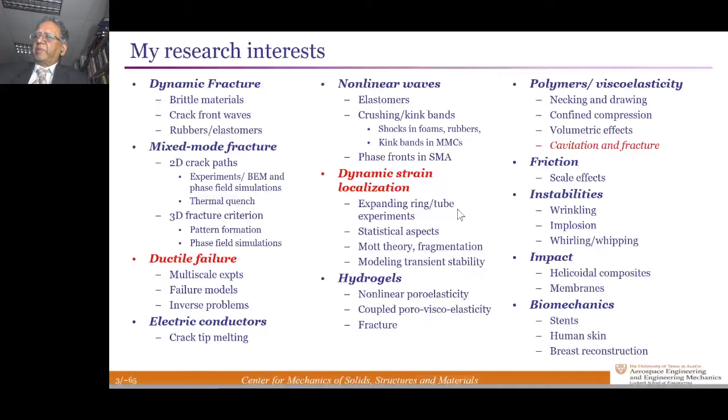And it's been a fun journey, because every time I get to design and run a new experiment, it's just pure joy. Experiments have been around for a very long time. I want to start on experiments with a story from an Indian parable of the six blind men looking for information on an elephant.

I'll provide this in a modern context. These six blind men are restricted in the sensors and diagnostic tools they can implement on the experiment itself, which is seeking knowledge of an elephant. Deprived of eyesight, they use their other senses of touch and feel, and each comes up with a particular picture or model of what an elephant is like. One thinks it's like a pillar, one thinks it's like a rope, one thinks it's like a wall, another like a spear, and so on. They're each convinced that their model is right.

And when they get together for their verification and validation meeting, they have a fight because each is convinced that he or she is right. What is needed here, of course, is more diagnostics. So they go for arbitration to a prince. He has other sensors, is able to see a bigger picture, more diagnostics, more information, a better model. So he says, all of you are right, but all of you are not right as well, because you don't have a complete picture. So what you need is more diagnostics.

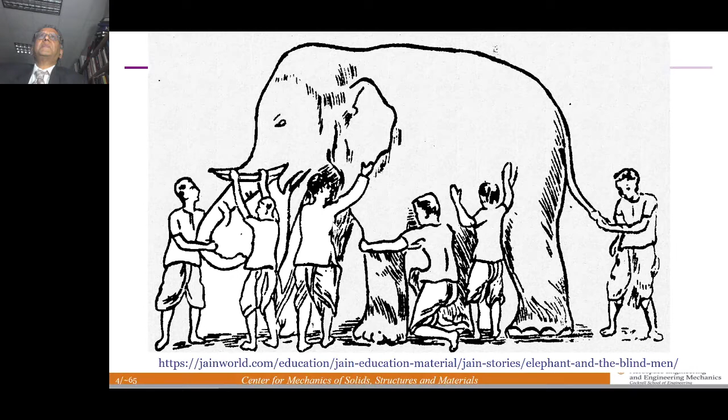Fast forward a few millennia. The founding father of sciences, in my opinion, Galileo Galilei, is reported to have said something like this, although there are questions about that: measure what is measurable, and make measurable what is not so. That's the essence of discovery. If you do experiments and instrument them with suitable diagnostics, you can develop much more insight into the problem and develop models that are truly predictive based on that.

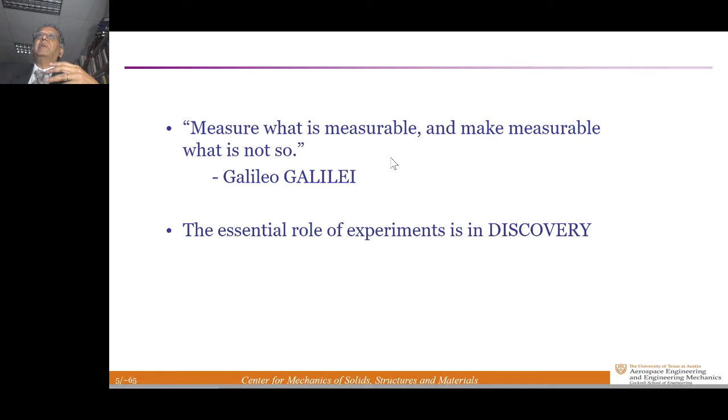So the interplay between experiments and models is very important, and it's been expressed very elegantly by a number of people. James Bell indicates that agreement, or a correlation, between data and prediction doesn't necessarily imply that any one set of assumptions is correct, or any one model is correct. You have to keep refining your measurements, you have to keep refining your models, until you come up with acceptable models that predict in a reasonably meaningful way.

But that means there's a plethora of models around for the same experiment. And the question is, what guiding principles should one use? This has also been a topic in the realm of philosophy for many decades, many centuries. The first and perhaps most elegant representation of this is called Ockham's razor. Ockham was an English friar in the 14th century thinking about the formulation of ideas, and in a cryptic way he says entities are not to be multiplied without necessity. All it says is, if you have a model, make sure the number of degrees of freedom is small—smaller the better—because the likelihood that model is right is larger, with fewer sets of parameters predicting a larger set of responses or outcomes.

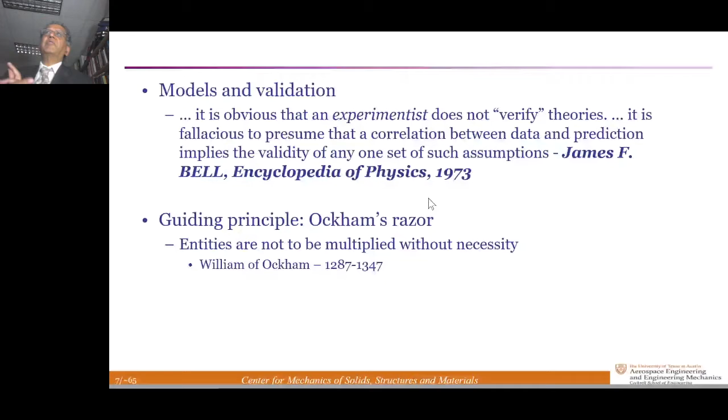So in doing experiments, I've taken a number of these ideas into consideration: Ockham's razor—make the simplest possible model to predict whatever phenomenon you want—and Galileo's idea that you need to instrument it and diagnose with as many measurements as possible. I want to illustrate this with a few examples. The first one relates to dynamic strain localization and fragmentation, and the key participant here is Haitao Zhang, who was a postdoc with me for a number of years. We wrote a few papers on this topic.

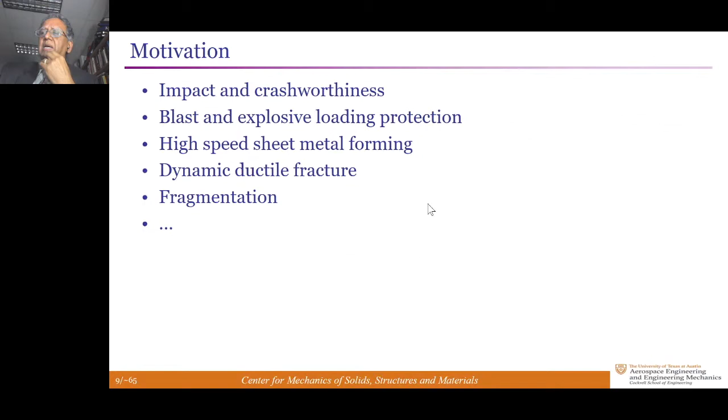It's a problem that arises in a number of applications in impact, blast, and high-speed metal forming, and so on. The main idea is for a ductile metallic material, if you do a quasi-static test, pretty much everybody knows that there's an inelastic response followed by localization at the Considère strain, and beyond localization, the bulk of the material or specimen doesn't deform, only the localized region deforms further, leading to eventual failure.

So the question that people raise is, what happens if the strain rates are large? Strain rates not quasi-static on the order of 10⁻³ per second or so, but 6 to 8 orders of magnitude larger, 10³ to 10⁵ per second. Basically two things could happen: a necking of this kind, or a sheet mode necking of this kind, where it thins in the third dimension but has a band at different orientations depending on the plane stress, plane strain constraints of the body.

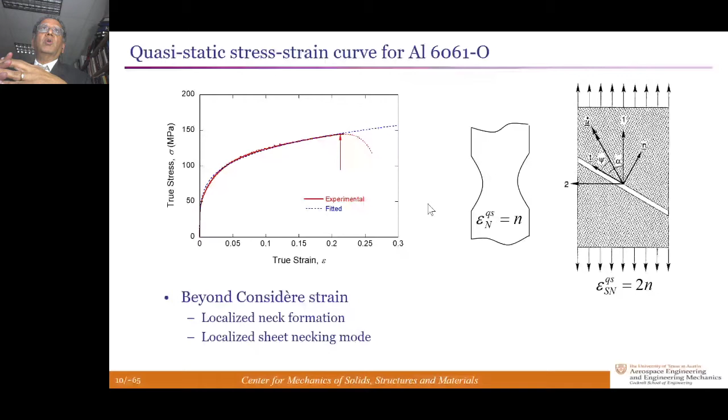There are a number of standard techniques for doing these kinds of experiments, and I won't go through the list of them. I want to highlight the electromagnetic loading because to me, it represents clean loading. It is a loading that arises without wave propagation. It loads through body forces, and the controls are done through electric currents. So the speed with which these things go are orders of magnitude larger than elastic wave propagation.

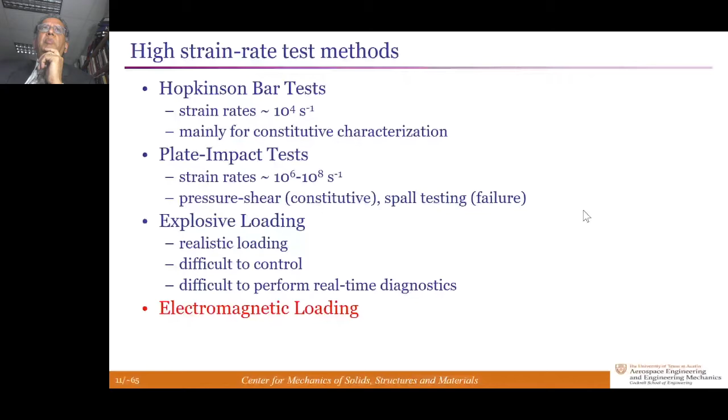So we decouple elastic and plastic wave propagation from the loading applied on the object. The idea is very simple. It was something that was introduced by Frithiof Niordson in about 1960 or so.

If you take a coil, electrical coil, and discharge a very large current through that, it sets up a magnetic field. If you now break that magnetic field with a thin ring, which is our specimen, a conducting material, it generates an induced current by breaking that magnetic field. The induced current is in the opposite direction to the running current in the coil. The electromagnetic interaction between the two results in a Lorentz force of repulsion between the two conductors.

The coil itself is held fixed inside a very stiff housing, and so it doesn't have the ability to move. But the specimen is free, and so it wants to get away from the coil, and it expands out radially, symmetrically, and in timescales of 10 to 50 microseconds, the object strains to strain levels on the order of 20 to 30%. Strain rates are on the order of 10³ to 10⁴ per second. The important thing is it's a body force loading. There are no stress waves necessary to generate the modes.

Over the years, there have been a number of different ways of instrumenting this. The most common one is to measure the currents flowing in the coil and in the specimen, and these are the measured values of the current. They are on the order of tens of kiloamperes, so they're very large and potentially dangerous currents. But you measure them, you know the driving force, and so you can calculate what the response should be. Most commonly, they picked up pieces of the broken specimen and identified from that some average measure of strain.

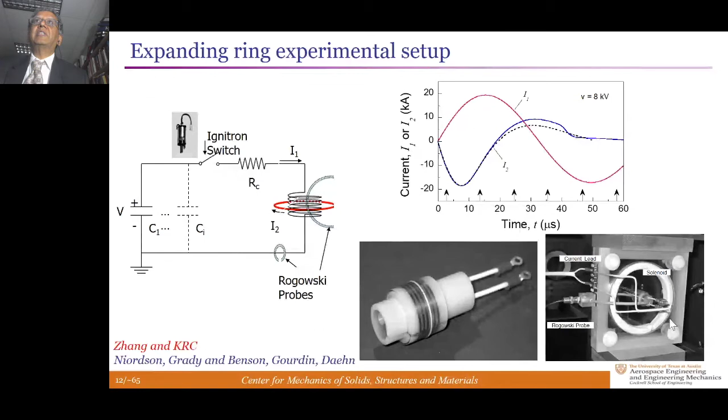So these are pictures that are taken once every 10 microseconds. This is a shadow of the coil and the housing. The specimen is at the outer perimeter of this. At the first frame, you see that there's uniform expansion of this. These are very high spatial resolution images that we can expand and see more detail. In the next image, the straining has continued, and you can see that the strain is more or less homogeneous around the entire ring length.

And at this point, the ring has broken in multiple locations. But here's where Galileo's measure what is measurable comes into picture. This particular camera has a combined streak mode and framing mode, so it is able to time resolve things in a particularly interesting way. More than that, when the ring breaks, it's circulating very high currents on the order of tens of kiloamperes, so it is breaking a fuse. There's an arc that jumps across there. The arc creates a shock wave in air. The shock wave is visualized here through Schlieren images that are a part of the aperture of the camera.

If you work back from the wave speed of the shock to where the event initially occurred, you could find precisely the time, relative to when the frame was taken, at which the first, second, and third fractures occurred. They were independent of each other. You could convincingly prove, to within sub-microsecond resolution, that this fracture had no way of informing that fracture through any wave, elastic or plastic propagation mechanism. So these fractures occur independently of each other.

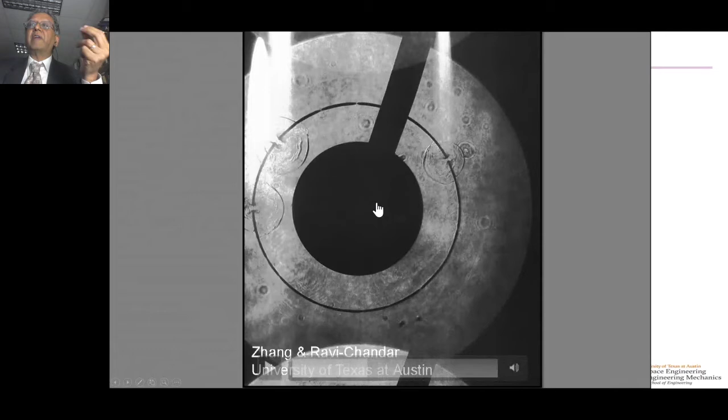Beyond this, the broken fragments simply move as rigid bodies, and it's not interesting. If you used any other kind of diagnostic on this, for example a VISAR reflecting off the surface, you would measure the velocity. This is a very common measurement, but it only gives you the kinematics of the problem. It doesn't say anything about when the fractures occurred or what sequence they occurred in.

If you take one of those images of the ring and enlarge it to see more detail, you could see there are about 40 necks that form in this one particular experiment. The ones marked in red are broken at this frame. The ones marked in blue will break in the next frame - we know that because we have the next frame. And the ones marked without any symbols did not break, did not even proceed to full necking.

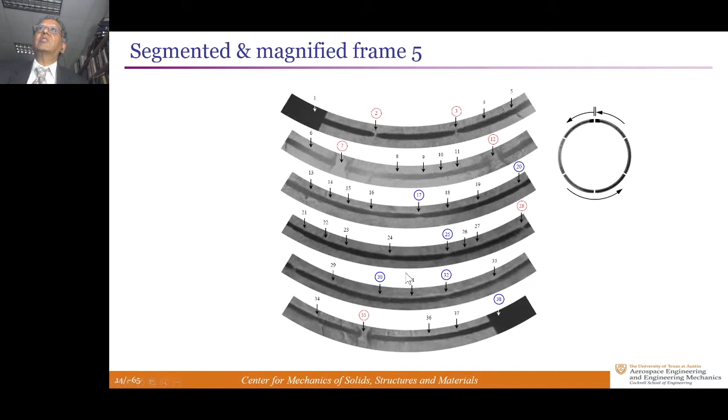You could make some very interesting images out of this by doing overlays and tracking particles to see local velocity fields and things like that, in much greater detail. I'm showing all of this to say how much information can be obtained from one experiment if, A, the experiment is planned to be a very simple loading condition, and B, the diagnostics are rich enough to indicate multiple quantities about the same event.

So from looking at multiple experiments of that kind - I'll come back to this at the very end - we had done on the order of 100 experiments of that ring expansion test in different materials to collect overall information about the response. The order or sequence of events is very clear from this set of experiments. First, there's uniform expansion of the ring, a one-dimensional stress state, very easy to calculate the response. Then there's the nearly simultaneous nucleation of necking localization at multiple locations.

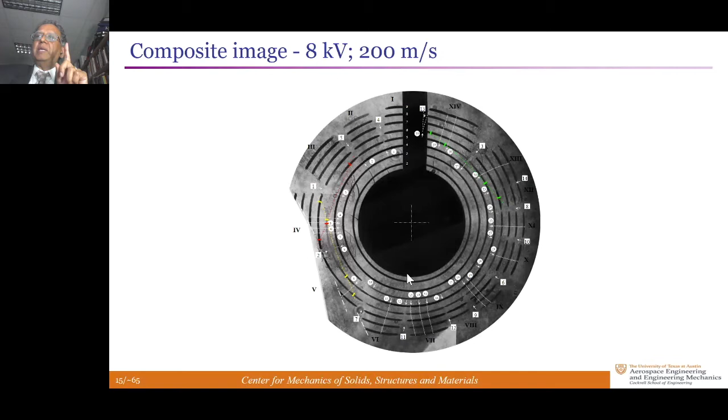If the experiment had been done quasi-statically, the first neck that forms would unload everything else and there would be no further necking. The dynamic body force loading, which strains each point independently, allows localization to occur at multiple locations. Each localization, as it occurs, unloads a certain domain, so only some of these necks are able to progress while others are under diminishing loading. Some go on all the way to fracture, but the other parts remain unloaded and deformed, providing more information about what happened during the fracture event.

You could collect all these fragments and do statistics of the fragment distribution and so on. I'll get to that in the next few minutes.

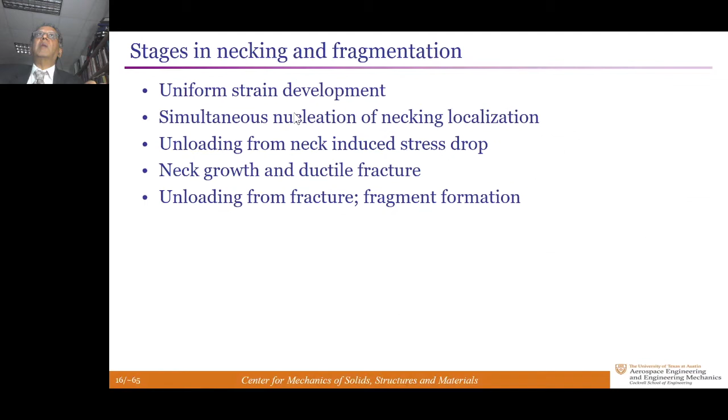Analysis of this up to the point of onset of necking is very straightforward. The first line says F equals MA. The force comes from the interaction of currents between the coil and the specimen, with resistance coming from plastically deforming the material as it expands out. The second line is the rate of change of current, which depends on the specimen moving away from the coil as a function of time. The last line indicates temperature effects and so on.

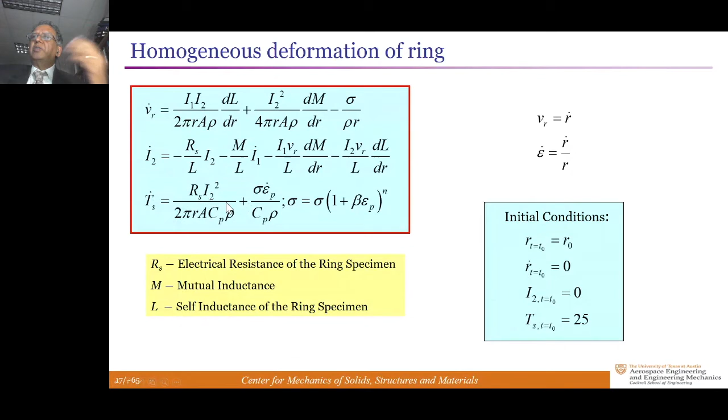But you can solve this - it's a simple first order ODE. By solving it, you can compare: the red line is the current supplied to the coil, the blue solid line is the current measured in the specimen, and the dotted line is the current calculated by that one-dimensional model. They agree until the onset of localization.

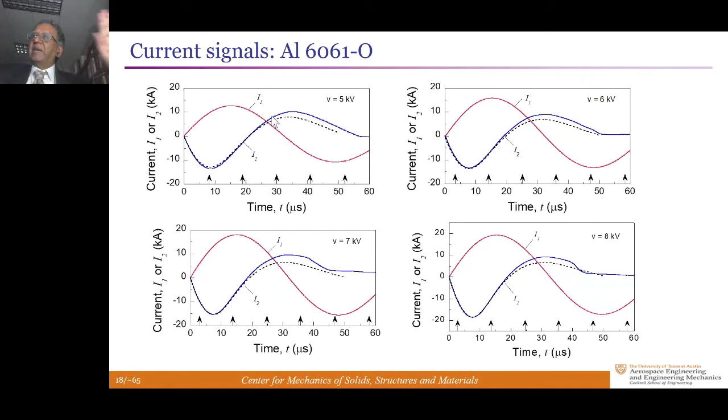So we can get a constitutive response of this thing until the onset of localization. You can also calculate the ring location or radius as a function of time, and this works even beyond the onset of localization, because beyond that it's just rigid body kinematics.

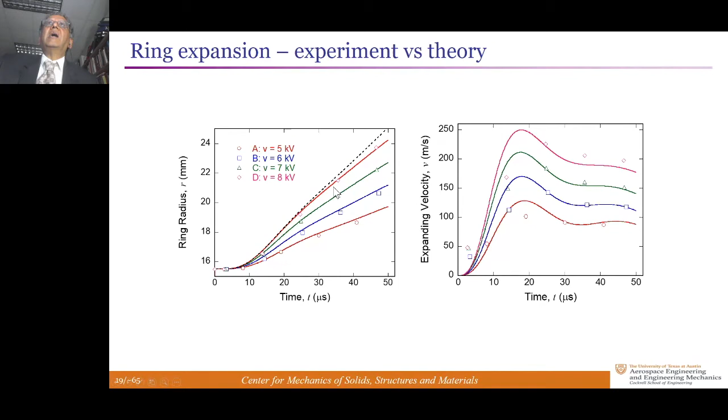But that's not the whole story. We need to know when it broke and how it broke. More diagnostics, and this time it comes not from the real-time imaging. These are evolutionary problems; things happen as a function of time.

A record of what happened at an earlier time is left in the specimen after the test is over, if you're able to tease it out in the proper way. Actually, Neville Mott, a physicist who worked on some of these problems,

explored this idea of the fragments, and he found constant strains in regions of the fragment. He thought the specimen had been fully exhaustion hardened, couldn't deform anymore, didn't have any strength left, and broke at that point. But if you look at this, this is a piece of the ring recovered.

I forgot to mention that at the outer periphery of our device, there was a very soft clay into which the specimen launches itself and slows down, so we're able to recover those specimen pieces without damage. If you look at one of those, this is a fragment which broke at both ends through a fracture process, but along its length the width is not uniform.

So if you measure the width of this and call that W of X along the length, you see there are regions where the width is constant, meaning it hasn't strained beyond a certain point. This is plastic deformation—it's incompressible—so you can take that width variation and convert it into axial strain of the specimen at that point.

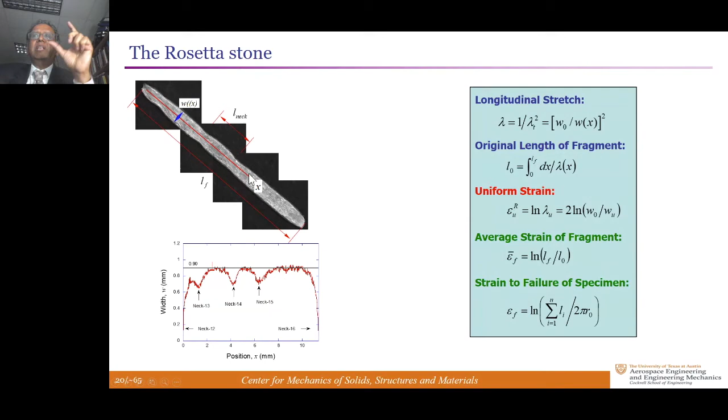What it says is, in pieces of the specimen between the necks, the strain is uniform, and the magnitude of that uniform strain can be calculated simply by knowing the width variation. That uniform strain is constant.

This is in an aluminum 6061 annealed. This is in a soft aluminum 1100, and this is in a soft copper 101.

The remaining strain in the unnecked portions of these ring expansion specimens is exactly the same as the Considère point in the quasi-static strain experiments. So what this says is, even under high strain rate loading of about 10 to the 4 per second, necking sets in exactly at the Considère point.

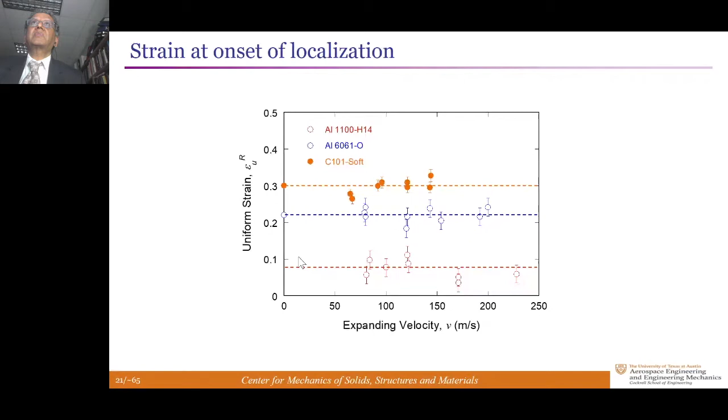This is contrary to a lot of models that have been around and a lot of calculations that have been attempted to extract strains from fragments, but I'll leave it at that.

You can also get the statistics of the distance between the necks, by collecting all of the 100 specimens, sorting out their distances between necks, and collating them with the speed at which the ring expanded, or the strain rate. The ones corresponding to expansion of 80 meters per second and 200 meters per second are overlaid here, showing that as the strain rate increases, there are more fragments, the distance between necks decreases, and there are more necks in each specimen.

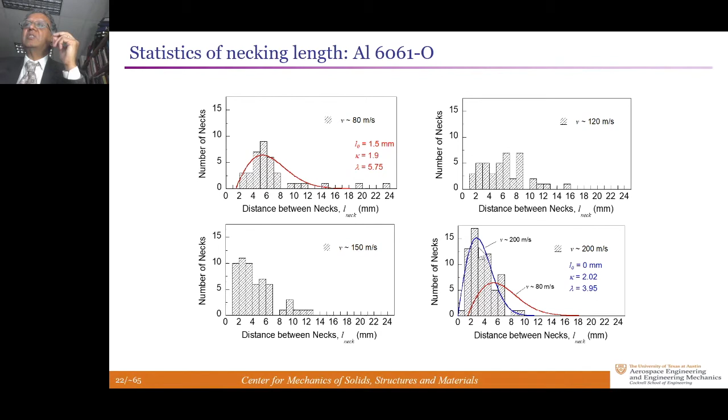It seems this is driven purely by statistics. There are attempts to do linear stability analyses, where you take the uniform expansion and perturb it with a sinusoidal perturbation over the entire specimen, watching for the fastest growing modes and saying those are the ones that will dictate the spacing.

If you compare with such analyses—this is the neck spacing observed divided by the neck spacing predicted by a linear stability analysis—you should see a peak at 1, but more importantly, you shouldn't see large amounts of unnecked regions, which is what we observed in the experiments. So we've actually questioned the suitability of the linear stability analysis to be predictive with respect to neck spacing.

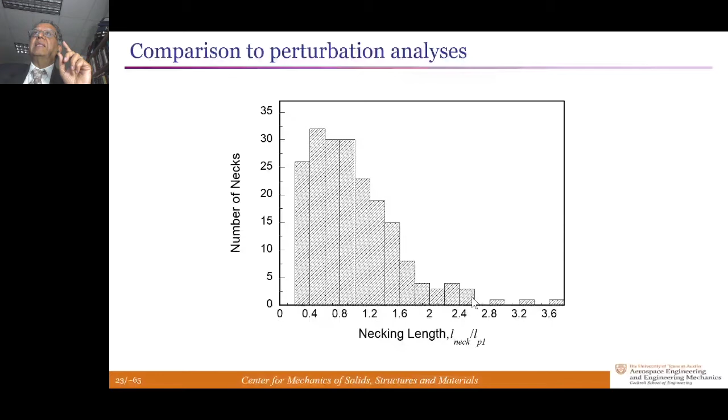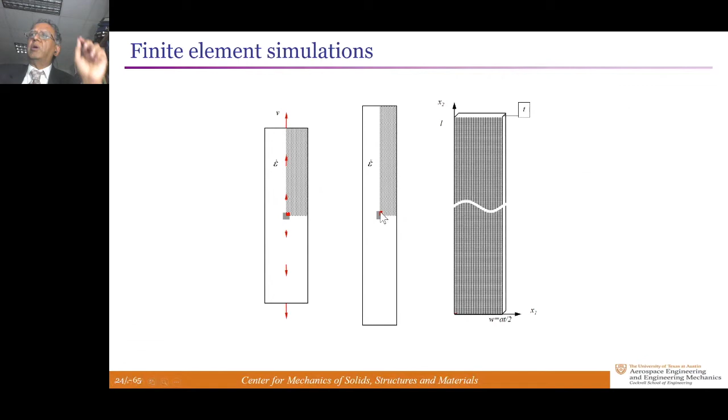I think it's more appropriate to think of a point perturbation and see how it will propagate through the cross-section of the specimen. We attempted this through a very simple numerical analysis: take our specimen, do a quarter symmetry model of it, put a defect at one corner, and see how the defect propagates across the cross-section.

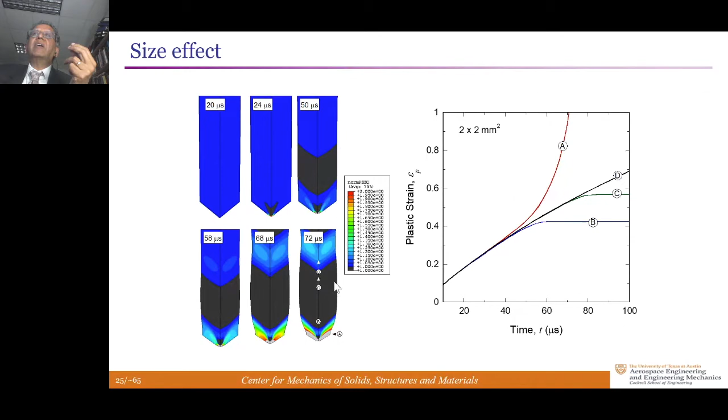If you do that, the defect is at one corner, and it grows through, and the necking starts to form, but regions far away from where the necking initiates are able to strain to much higher levels, depending on the cross-sectional geometry of the specimen. So this necking strain is specimen-size dependent, coming purely from inertial effects. For more details, you can contact me, or I'll refer you to the papers.

The next step in the same experiment is an innovation for looking at cylindrical objects. If you have a tube instead of a ring, it's difficult to diagnose this with the kinds of instrumentation we have. Typically we are restricted to watching from one side, a part of the cylinder, and post-mortem examinations.

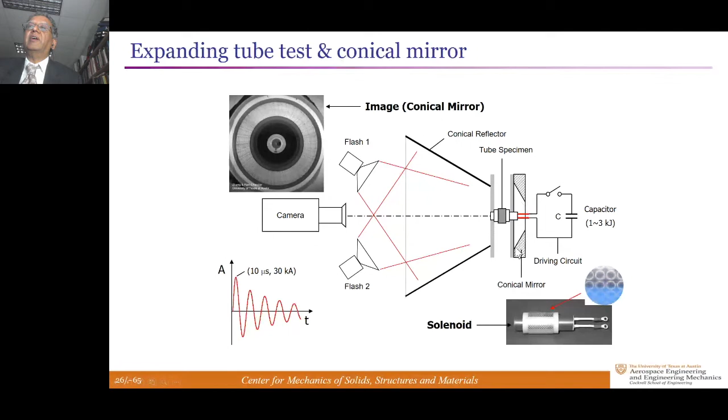What we decided to do was take the coil, slip this cylindrical specimen along the coil, build a conical mirror, and place the specimen coaxially with the conical mirror, so that if you view the camera on the surface of the conical mirror, we see a projection of the entire surface of the cylinder.

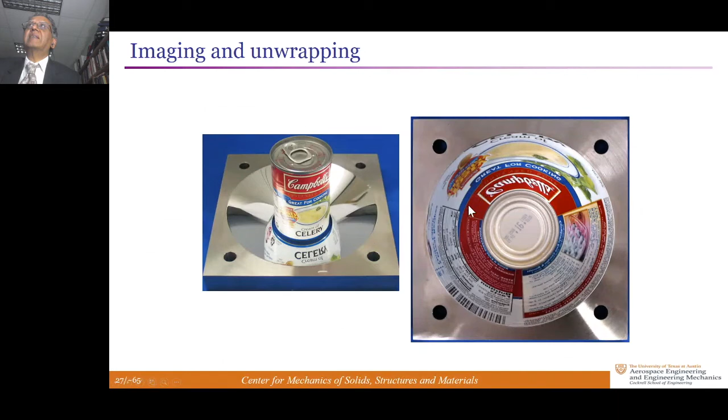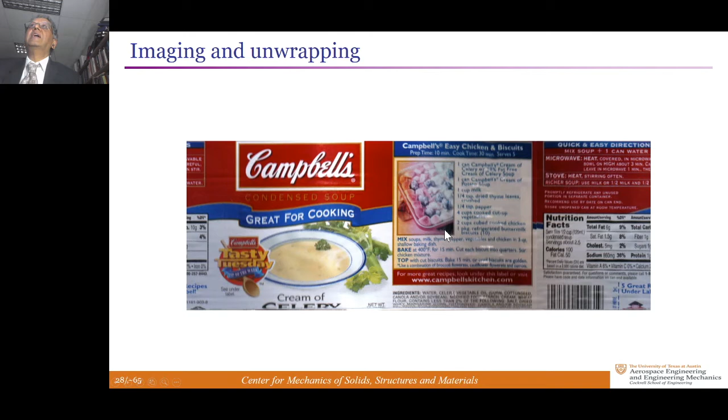To make that visible, I'm going to use Andy Warhol's favorite object. There's the surface of a cylindrical object. This is the conical mirror we had specially constructed using an astronomer's shop. If you look coaxially with it, the entire surface of the soup can is visible on the polished surface of the mirror. Then you can do digital unwrapping of that and see every point on the surface of the cylinder. Just add a high-speed camera, and you get the ability to diagnose what happens on the entire surface of the cylinder.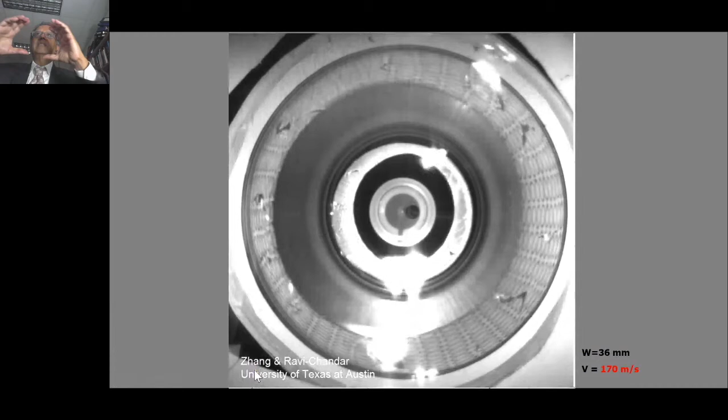I'll play this video, and you can see the cylinder expands out. At some point it fractures into multiple pieces, and you can see sparks flying from the arc discharge. This is a deceptively slowed-down experiment - the entire experiment took about 80 microseconds, but you can slow down everything with digital magic. You can then look at every frame and see the onset of localization, the onset of fractures, and how the fragments form.

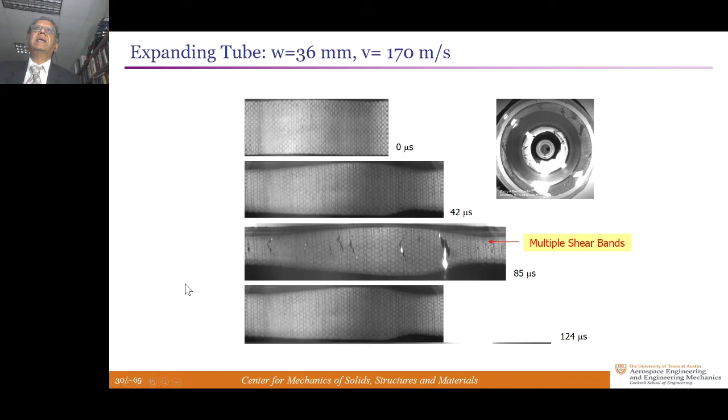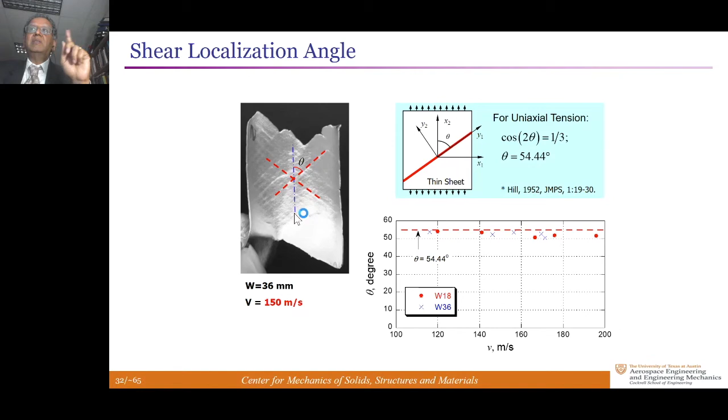I think I'll skip these things. Again, post-mortem examination is important because it shows localization has occurred in multiple locations, of the sheet mode necking in this case. The angles are exactly what's predicted by Hill's quasi-static analysis for uniaxial tension. So again, strain at onset is exactly what's predicted by quasi-static analysis. Strain rate effects in this particular material, a 6000 series aluminum alloy, don't seem to have a very strong role to play. You can construct dynamic forming limit diagrams from this, but I'll again skip that.

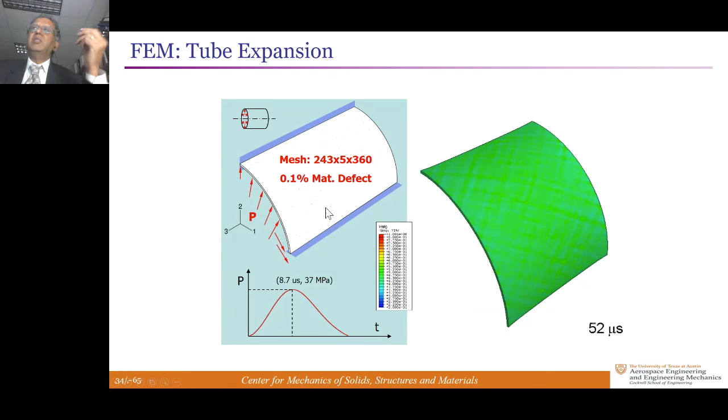One simulation: a very simple elastoplastic model, strain-rate independent, but with a number of defects thrown in to create nucleation sites for these diffused necks formed everywhere, recreates patterns very similar to what's observed here. There's not a quantitative match yet because we don't have a very good stress-strain curve to go to the strain levels seen in these objects, but that's a story for a different time.

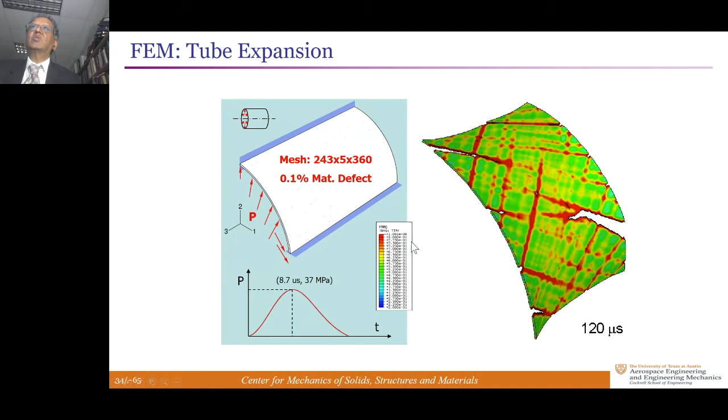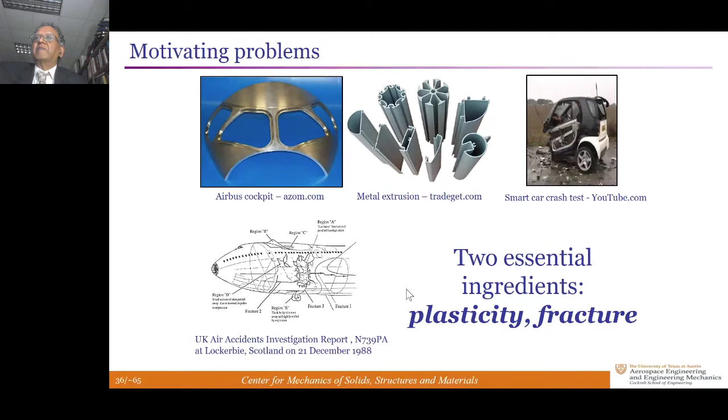That's the first story of dynamic strain localization. The second one involves similar materials, polycrystalline materials, but now ductile failure at slow strain rates, commonly encountered in a number of applications like forming. There are two essential ingredients in making predictive models for these applications: plasticity and fracture. It turns out fracture is just the endpoint of where plastic deformation leads to localization. You need very careful experiments to identify strain levels at which these things happen.

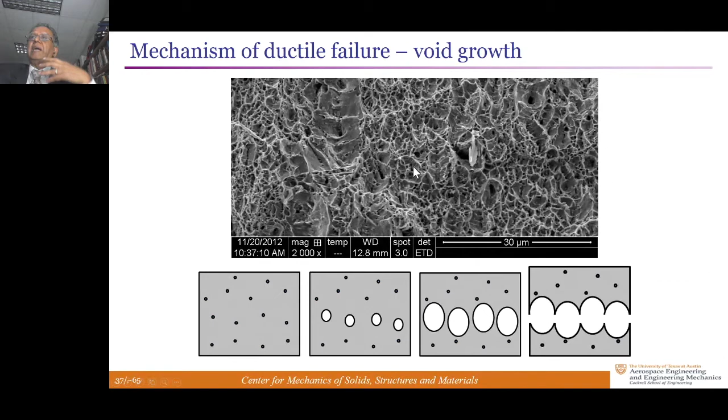Ductile failure immediately brings up the idea that there is void growth and coalescence processes going on. And if you look at fracture surfaces, they do indicate that you have dimples on the surface, which are evidence of cavities that have formed and coalesced.

The status of this has been captured in a couple of challenges presented by Sandia National Labs to see if people could predict the response of different structural configurations given experiments for calibration of material properties of both plasticity and fracture.

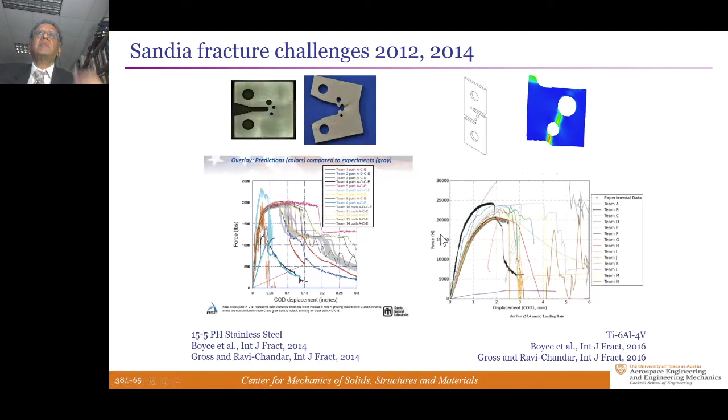I started looking at this about 10 or 12 years ago, and we had this idea that we need to look locally at the picture of what happens to plastic deformation and failure mechanisms in a variety of materials, both pure metals and metals or alloys that have impurities of various kinds.

So we chose an oxygen-free, high conductivity copper, 99.99% pure, no alloying elements, no second phase particles, nothing. The grain structure is shown here. They are kind of platelet-like grains that are oriented in the direction of rolling.

On the right-hand side is a 6000 series aluminum alloy. This is age-hardened to T6, so it has precipitates that are on the scale of the lattice level, but they also have second phase particles, some of which are identified here, bright white in this etched picture.

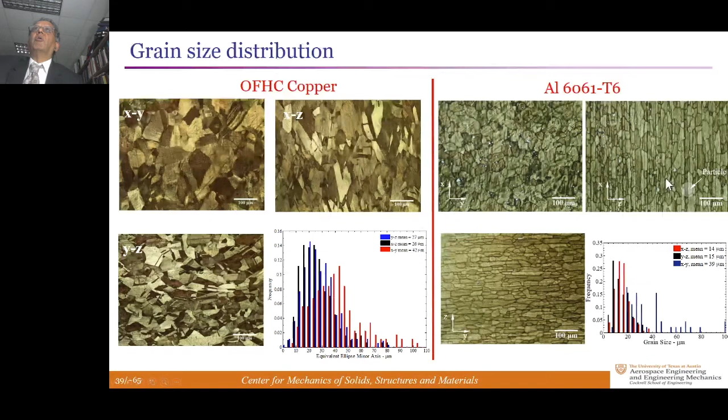Once again, you can see the grain size distribution, on the order of tens of microns. The volume fraction of the second phase particles is less than about 1%. These are hard particles, and they do play a role in how the material on the right deforms and fails, as opposed to the one on the left.

We do tension tests. Everybody does this to characterize material properties. But we did what are called interrupted tests. These were commonly used, but not so in recent years. The idea of an interrupted test is you run the test once all the way until failure, so you know what the global response looks like, for both materials.

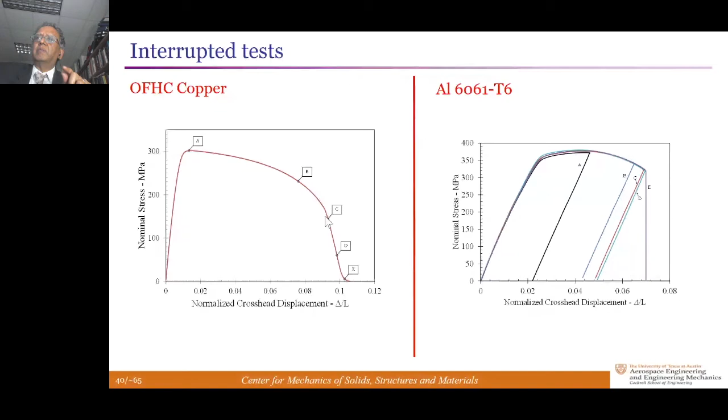Then you run it to the peak load, unload it, put away that specimen. Run to another load level, third, fourth, fifth, progressively approaching failure, unloading and examining the specimens. The idea is this is an evolutionary process. Something is going on; both deformation and failure mechanisms start at some point and progress as you continue loading. A trail of what happened is left in the unloaded specimens. If you interrogate and explore them in great detail, you will learn something about what happens.

So let's start with the copper. At point A, necking localization occurs, but you really don't see any change in the structural dimensions of the specimen at large scales. At B, this is what the cross-section of an initially straight specimen looks like - this is the neck that has formed. These are high-resolution microscopic images of the grain structure that have been assembled together into one piece.

They're made out of 200 microscope images in one piece. These were done in the days when automatic stitching of these things was not available, but since that time, the technology has improved to do this in very short order.

If you come to this point at C, the neck has developed more. I'll expand this - this is why I needed a second screen. You can see greater detail. I will zoom into something here.

This is an image of every grain at every point of the cross-section, and you can measure the dimensional changes. You could see a lot of other features I'm not going to outline - for example, these are streamlines of the flow that I can identify from this. Streamlines break the surface, which means there's been a discontinuous event taking place.

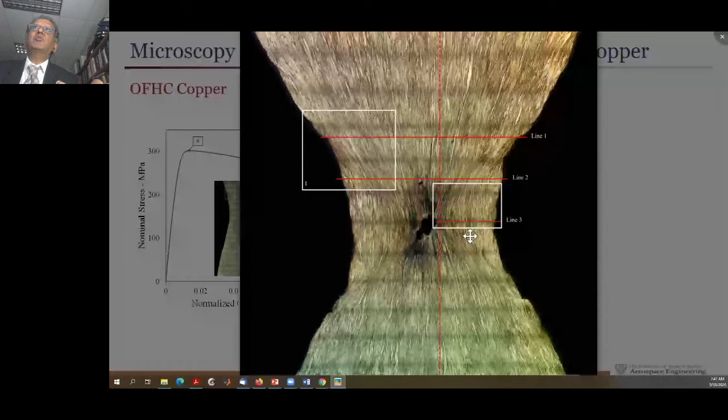And to make that visible, take the same specimen and look at it under an electron microscope - you could see the corners that have been formed. So it's breaking in a very, very weird way, one way to put it. It's creating rectangular corners inside of a material.

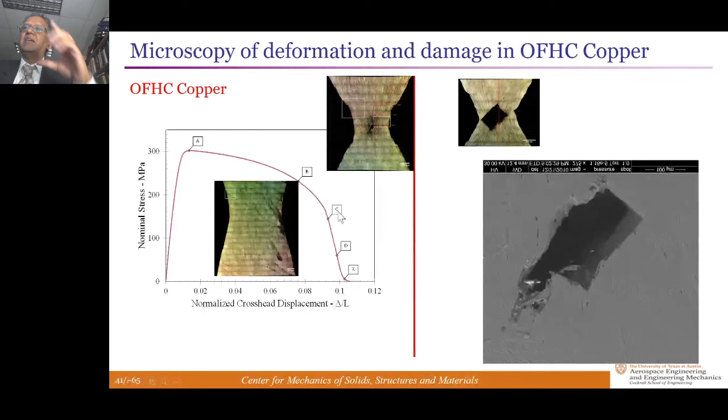If you continue loading to point D, that rectangular cavity remains a rectangular cavity and enlarges inside. There's some interesting mechanism underlying that. If you slice it perpendicular and go in the third dimension, it's a tunnel. So this rectangular cavity is actually a prismatic cavity that forms along the width direction of the specimen.

Finally, when it breaks up at point E, it forms two wedges. These are not cup and cone fractures - you cannot put them together. A cup and cone will have mating surfaces. These don't mate; unless you deform them, you couldn't make them mate.

So this formed by a fundamentally different process, and it's also revealed by doing electron microscopy on the surface of those interior cavity surfaces. There are no voids, just serrated ledges indicating discontinuous plastic slip along crystallographic slip planes that result in the separation of this material.

This goes back to something Orowan found in single crystal aluminum specimens called the alternating slip mechanism. We've been able to assemble this alternating slip mechanism to argue that this is what creates the rectangular cavity inside a polycrystalline copper specimen, but it has to be pure. If it has second phase particles or other impurities, it will destroy this mechanism completely.

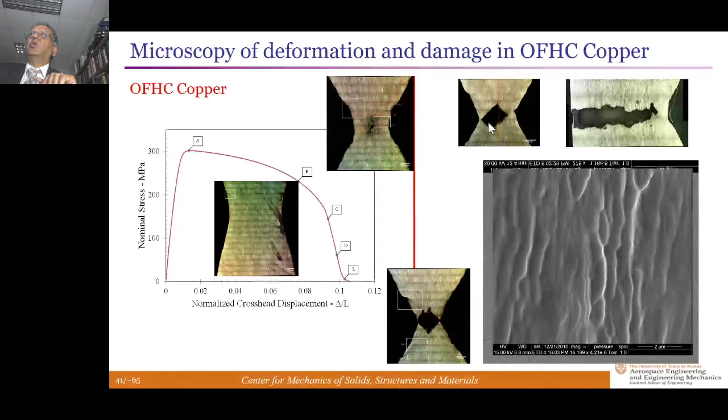The counterpart, the 6000 series aluminum alloy - again the same thing, unload from A, the width of the specimen is here. You hardly see any evidence of necking at this point. The load has started to drop, localization has started to appear, but no change in the dimensions.

At B or C, you see something like this - this is the neck that forms. And eventually at E it fails, but this time the failure is somewhat different from what we saw in the copper. Again there is plane strain localization, and these bands along which failure occurs are localized along that orientation, but they fail by a different mechanism.

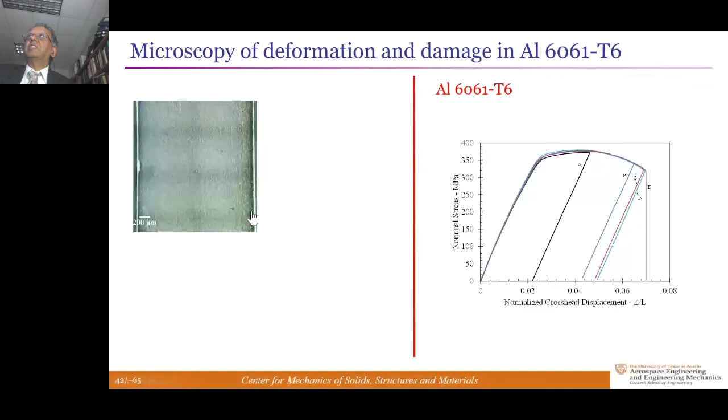If you look at the surfaces of those fractures, they're fully dimpled, indicating a void growth and coalescence mechanism. If you look at specimens just before point E, you don't see any cavities. That means all of this part of the response is driven simply by plasticity and not by any damage mechanism - damage occurs at the very tail end.

We've been able to prove this through X-ray measurements that I was planning to talk about, but I don't have time. They form at the very tail end, when the material is about to break, and furthermore they're highly localized. If you make a section along this line and look just below the surface, how far below does the surface do these dimples form?

This is the surface of the fracture. These are sections below the surface. If you go about one grain diameter or so, there's no more damage anywhere. So damage occurs late in the game - I'll define what I mean by late in the game in a few minutes - and it occurs in a very localized manner. The rest is all plasticity.

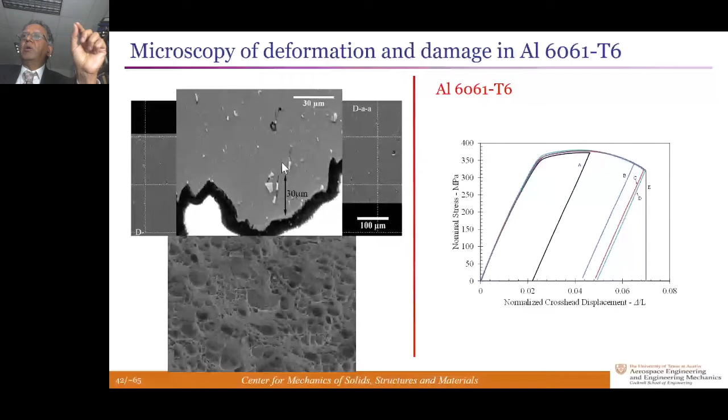So what more can we diagnose? How much more can we extract from the experiment?

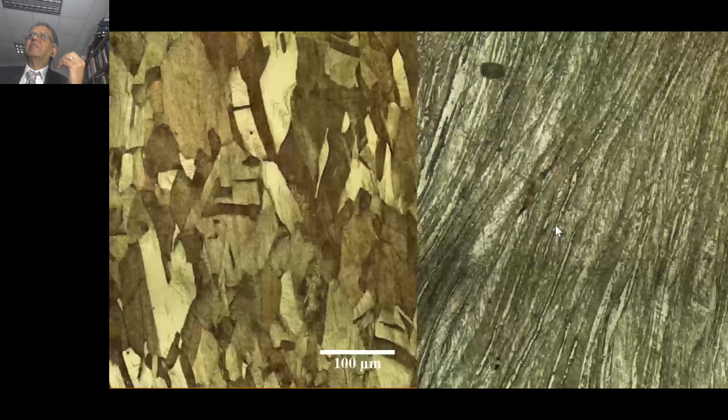These are images of the copper grain prior to loading, and on the right-hand side, after loading, when the specimen has failed. You can see grains that were about 20 or so microns in width have now gone to something about 2 to 4 microns in width. They've elongated significantly, roughly 10 times their initial length, and decreased accordingly. So the strain levels here can be measured simply by looking at grain statistics before and after loading, on a point or region-wide basis.

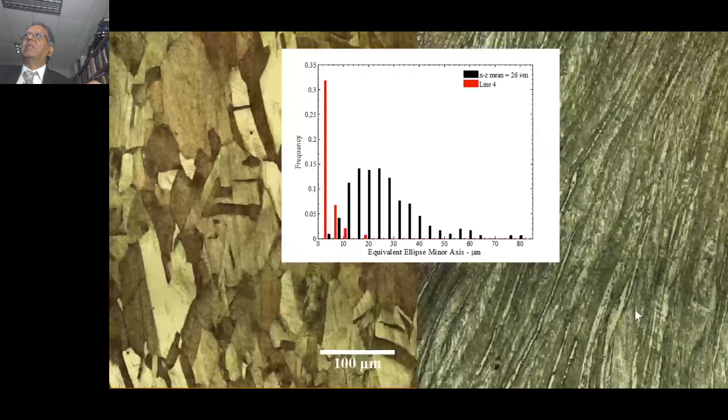And these strain levels are enormous, on the order of - this is how you calculate the strain, but I'll go by that - strain levels locally are on the order of 2 to 3 without any damage. This is pure copper, and it can go to such strain levels.

So if you want to use a strain-to-failure criterion, making global measurements is almost irrelevant because locally the specimen does something completely different. We've been able to observe local strain levels on the order of 3 to 3.5 with moderate triaxialities, and about 2.5 with high triaxialities, without failure. This is what I mean by late in the game - you have to allow the material to strain to such levels and develop constitutive models applicable to such strain levels before fracture occurs at all.

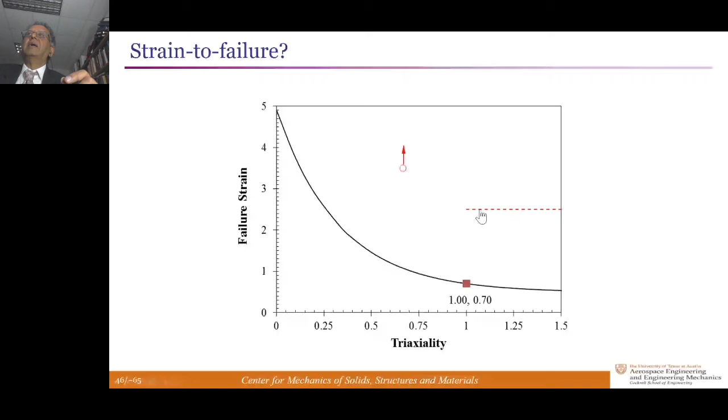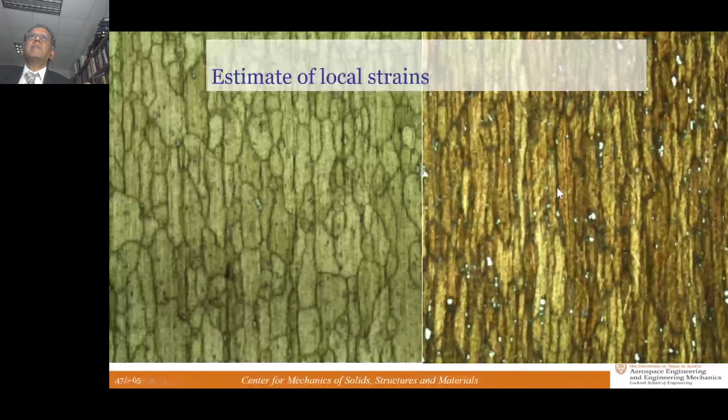Corresponding measurements for the aluminum alloy: grain structure prior to deformation, grain structure after deformation, and you can see strain levels are on the order of 1 to 1.5. Again, globally calibrated strain to failure criterion, locally calibrated strain to failure criterion.

It's still essential to calibrate these strain to failure criteria appropriately through direct measurements. Here we did not have those measurements, so these were indirect calibrations, but that's something to keep in mind for the future work.

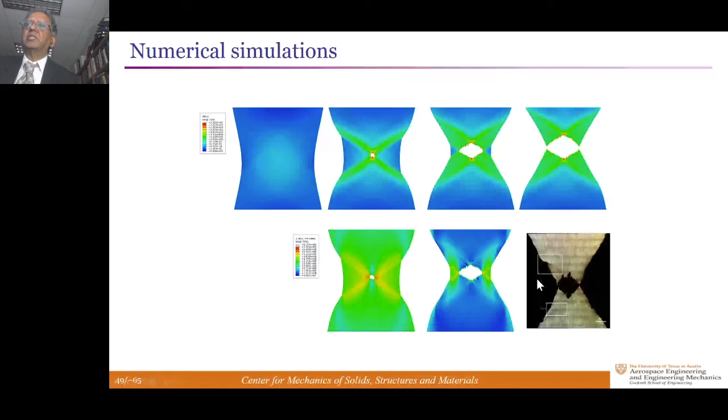All right, the last one is one Oscar made a reference to. It's been a pleasure to work with Oscar in these things. We've had, I would say, fights over what constitutes failure and appropriate failure criteria. They have not stopped yet. We're still fighting. But this one was a very interesting experiment.

It's a recreation of something that Gent worked on starting in the 1950s in PDMS specimens. This is a PDMS with a glass bead embedded inside it. If you make the specimen badly or poorly, the bead will separate from the PDMS and you'll see a debonding, and that's not a desirable thing.

So you go through special processes of tailoring the surface so that you have a very strong interface and there's no interfacial debonding. Then cavities pop in the bulk, and this is an important nucleation problem because this is the starting point of failure in these materials.

He performed an experiment in 1984 where he had two beads confining the region between them and tried to obtain images of what happens as a function of the global strain between the two beads. He found that some things happened near the poles of the beads, but then something transitioned and occurred in the midline between the two pieces, which turned out to be a crack.

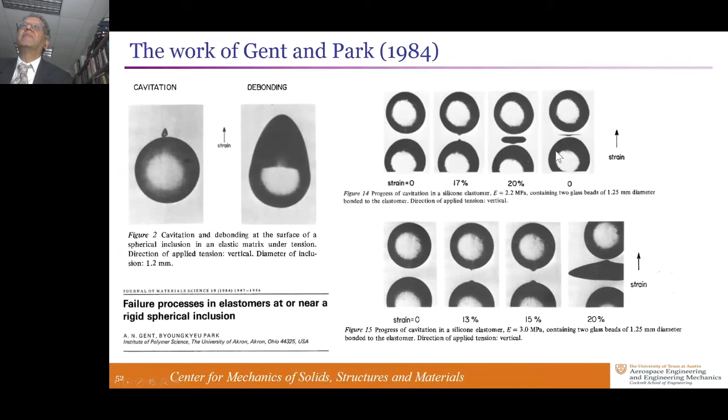There are multiple explanations for this, and I don't have time to go through all of them. One is that it is an elastic instability of a spherical cavity in a neo-Hookean material, and there are bifurcation calculations showing that if the pressure level reaches 5/2 of the shear modulus of the material, a small cavity will grow in an unrestrained manner.

Max Williams, my academic grandfather, had a different idea where he introduced the notion that fracture energy on the surface must be accounted for, but he still worked on this within the framework of a neo-Hookean material. So the neo-Hookean instability was still at the limiting part of this picture of fracture.

The basic question is: is this cavitation and its growth a deformation problem leading from instability, or is it a fracture problem leading from surface growth? So new experiments, new diagnostics are needed in order to accomplish this.

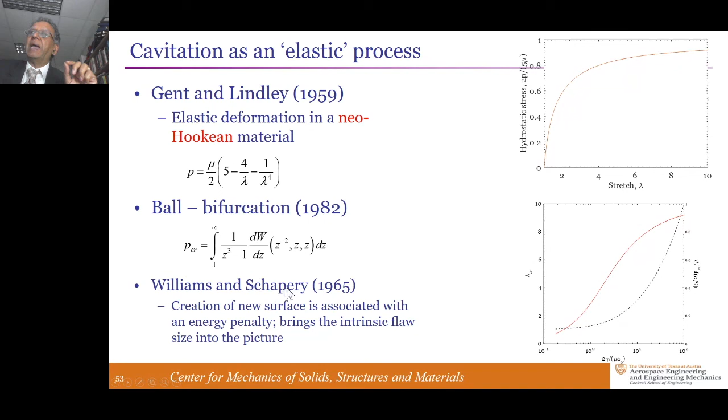So we did experiments on the same material. Dow Chemical seems to make something that's very consistent over decades, with the nominal composition that everybody uses. We also recognize that you could play with the elastic stiffness and stretchability of the polymer by varying the composition to non-recommended stoichiometric cases.

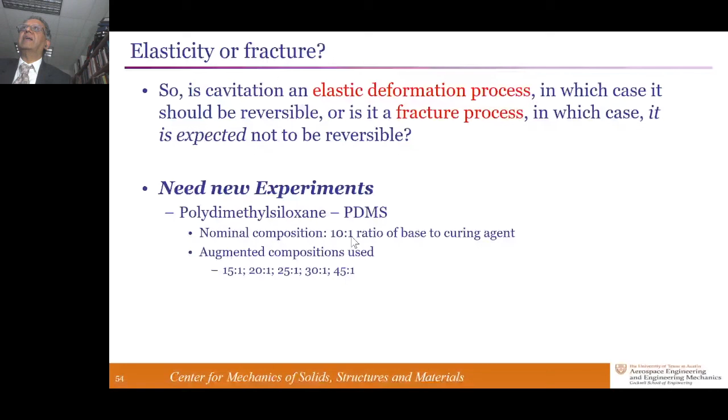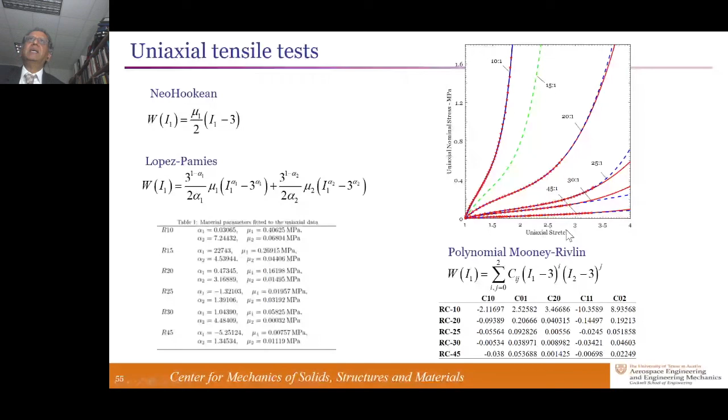I'm running out of time. So all we did was put this in the bay of a microscope at high magnification, put a video camera on it at 50 frames per second to be able to time resolve, and then run the experiment. And I will just play this video.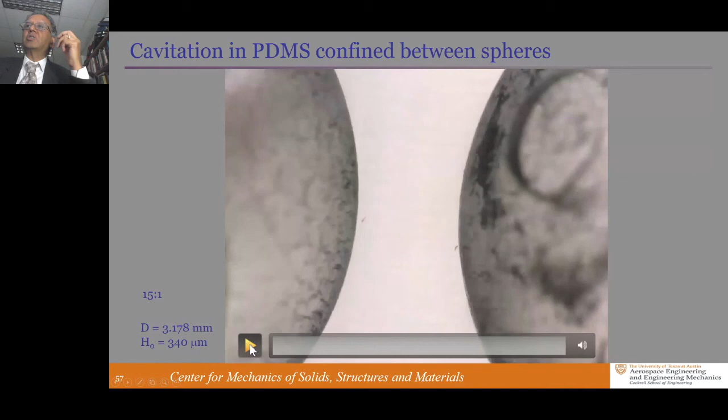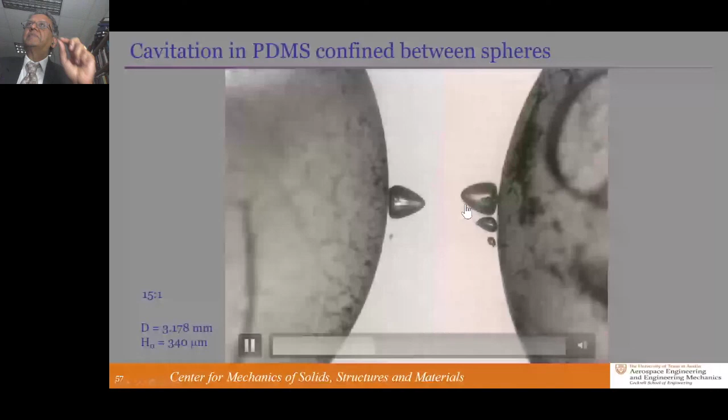And you can see there's a stochasticity to this. There are different nuclei that get popped up at different time instants, meaning at different global or local stretch levels. And they don't interact with each other. They don't coalesce. Some of them have grown to very large extents. And you could very easily visualize that these are penny-shaped cracks that if you unload them, they will go back and coalesce with each other. The two surfaces will go back to each other.

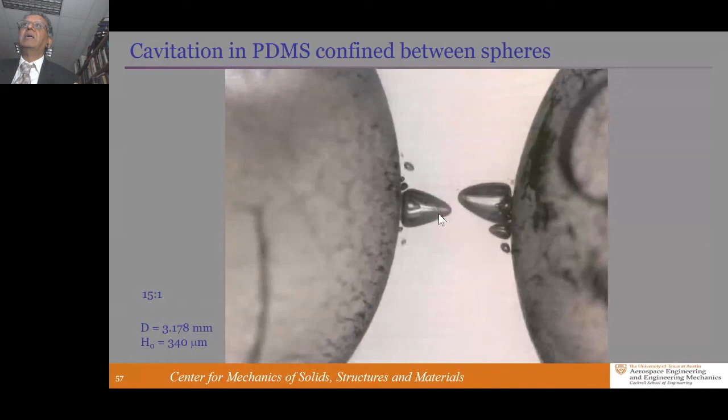All right. So a very simple estimate of the size of the cavity when they first pop is it's about 10 microns. Initially, the defects are no larger than about 1/10 of a micron, because if they are larger than that, they'd be visible optically, but they're not seen in these images. So we assume that the largest possible flaw there is on the order of 0.1 micron, which means there is a factor of 100 between them. So the approximate guess for a stretch is about 100.

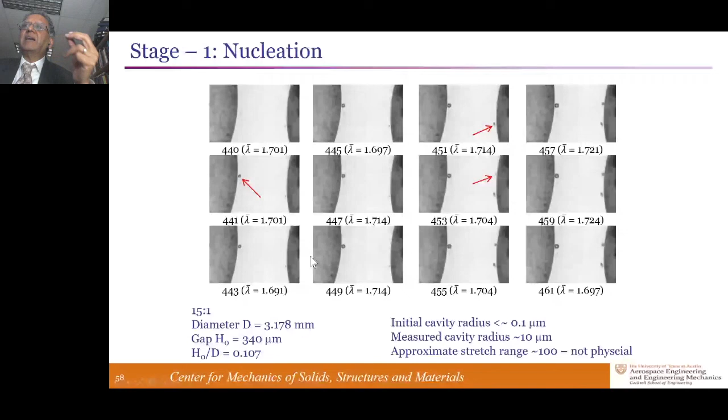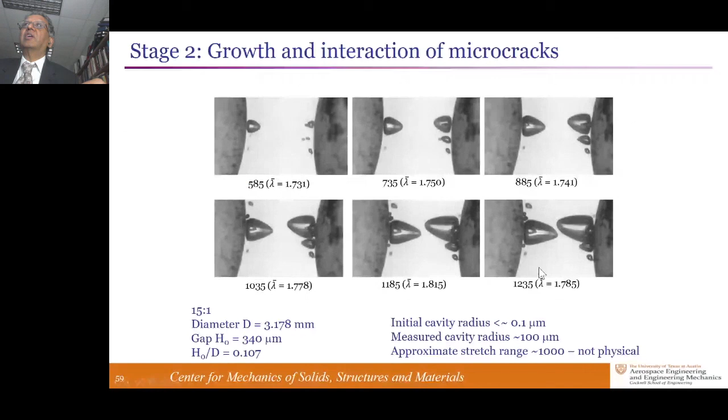This is physically unrealistic. No material, no PDMS is going to stretch to a factor of 100. So even when we see the first object that's there, it's not a cavity, but it's a crack. So fracture is an essential part. If you look at a later stage, the picture is even more dire. Stretches are on the order of 1,000. This really is a crack, and we've been able to show that by unloading it and looking at that.

I want to skip all of these things and go to one final picture, which is something that happened serendipitously. We unloaded the specimen and found that these cavities were closing back up. And I'll show this by one experiment. The red line, small line, is the initial distance between the two. We stretch them.

Somewhere about there, there's a cavity that pops from the right-hand side, and then we unload it. So now we're going to start unloading. We unload it back to the original place and hold it there. The black spot disappeared, which means the cavity has closed. If it is a cavity and you reload it, you expect that it would open up. So we reloaded, it hasn't opened up at all. More than that, we reload it to the same place where it was before, where the cavity from the right-hand side had popped. It hasn't grown.

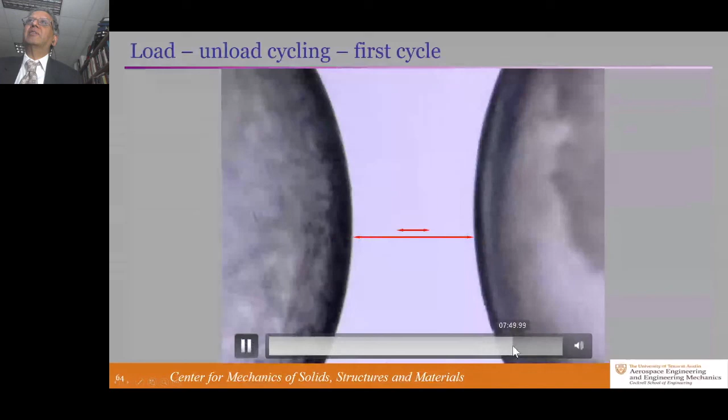If you go even further there, it pops, but this time from the other side. So the first cavity that formed was healed. Not only was it healed, it was stronger than what it was originally. Interesting thing to talk about, and Oscar and I have been figuring out or arguing how to make this thing work. We've done a number of cycles of loading and unloading. Each time it seems to get stronger, but with some kind of a saturation. So we're dealing with statistics of defects that are nucleating these cavities, and there's a large problem to be explored here further.

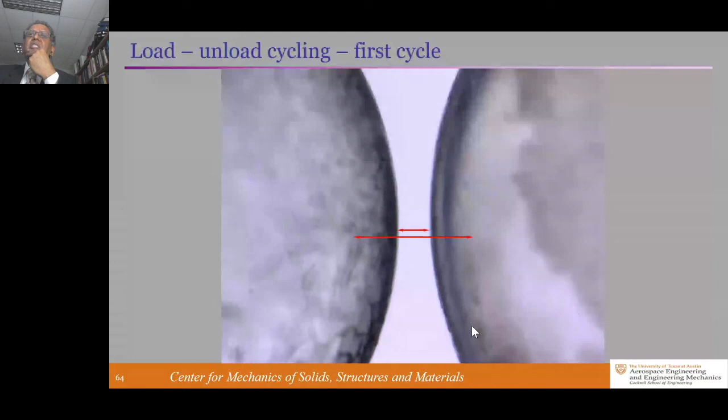All right, with that, I'm going to close. I think I took a little bit longer than I anticipated, but I want to close with a quotation from Tresca, another pioneer experimental scientist, who says that this work has not been done as a result of preconceived ideas and as an end we propose to reach from the first. It has presented itself to us only in consequence of varied experiments, realized in the first place in complicated circumstances, which we have striven to reduce more and more to conditions which are simple and such as to permit the laws of the phenomenon to be studied easily.

This is the essence of discovery experiments. You do many of them. You don't know ahead of time which one's going to succeed. You refine them until you find that simple experiment which says, aha, I know what's going on.

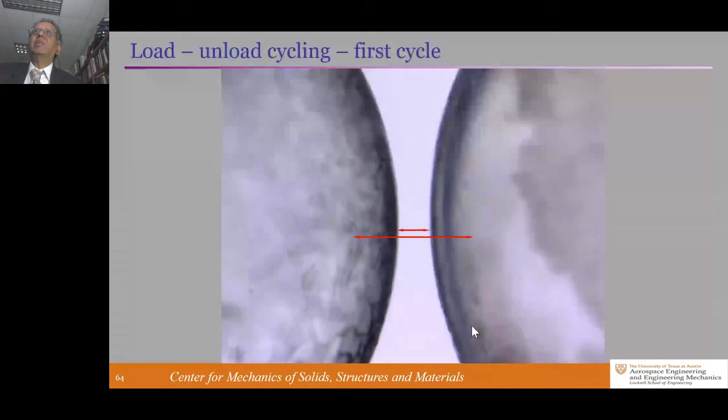With that, let me stop, show you a picture that I didn't talk about because I like it. It's a heterogeneous deformation and failure in an elastic plastic material.